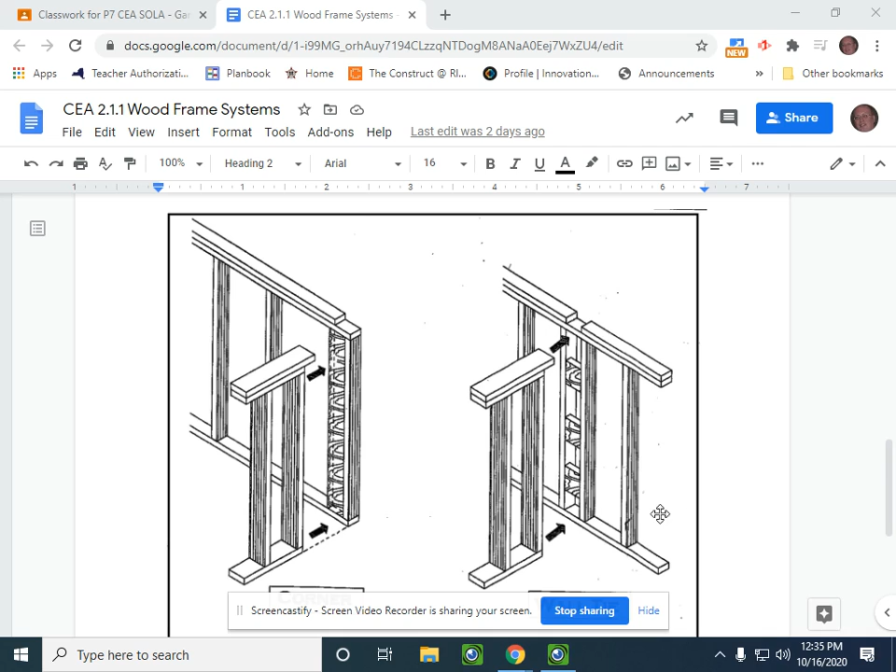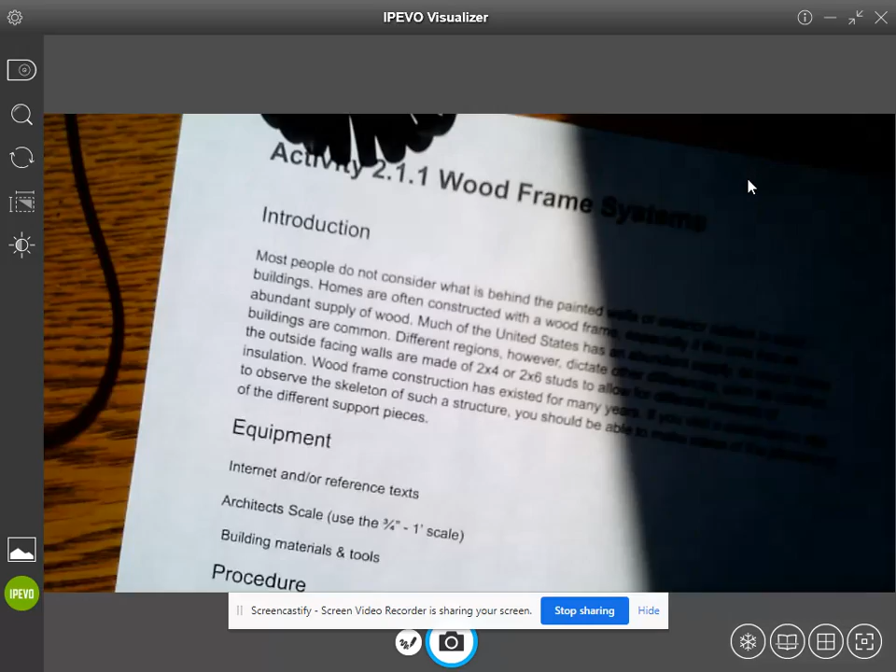And we're going to take a look at the wood frame systems, the second part of this, or this page right here. Now, we're going to measure, and you're going to use your ruler to measure these things. Excuse me. So first thing is find the 3/4 scale, and you want it oriented to the left.

Now, we know that we have the 0 there. That's the larger set of numbers, the ones we're going to read for this. And going to the right, if you'll see 1, 2, 3, 4, 5, so on and so forth, that is 1 foot, 2 foot, 3 foot, 4 foot, so on and so forth.

Now going to the left, remember what did he say the length was of that area to the left? How many feet is it? Is it a foot? Is it 2 feet? What is it? Pardon me? It's 1 foot, right? So it's 12 inches.

So if you take a look at this set of lines that's to the left of the 0, how many lines are there on this left-hand side of the scale? Take a look. What'd you say? Somebody said

it's 24. Because when you go to the left, the first line is actually 1/2 an inch. The next one, which is a little bit longer, is 1 inch. Then you get the next short one, which would be 1.5. The one after that, it's as long as the one that's the 1 inch. That is going to be 2.

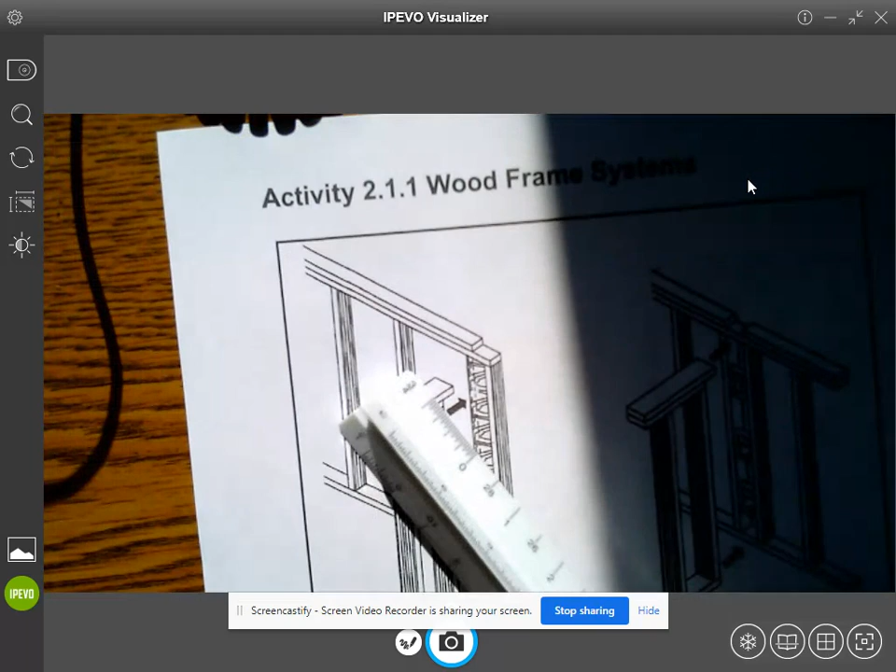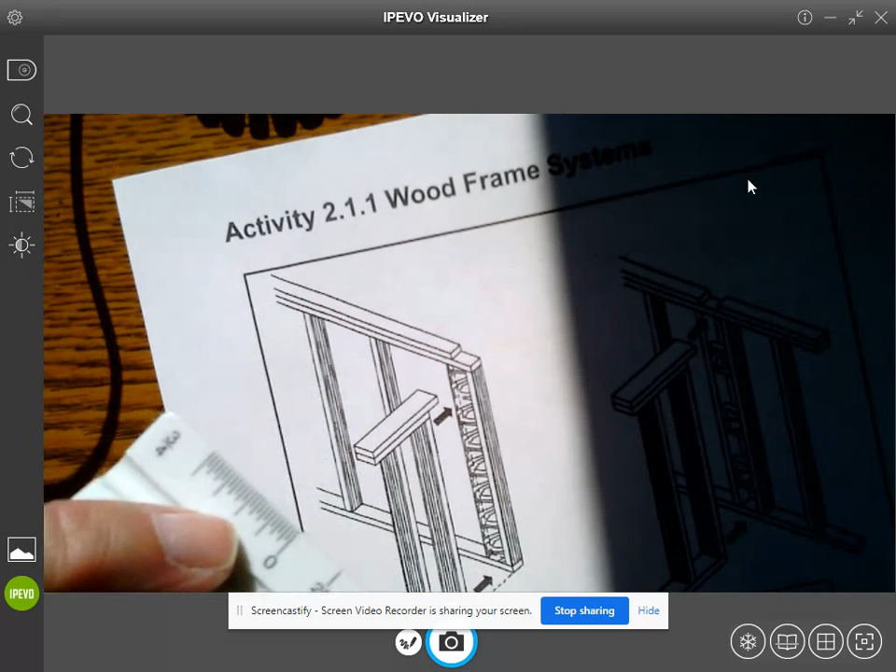And then the very next up, in terms of length, will be the really long ones, and those are 3 inches. So if you take a look at this, you'll be able to see that there's 1, 2, 3, 4 of those long lines. So each one of those tall ones is 3 inches in space, okay, distance-wise.

All right, now this is where an architectural scale differs from other scales. I'm going to pull a shade here and see if I can help with this picture-wise. Okay, so I'm going to measure this line right here. And the way I go about doing that first is I put the 0 on this end of the line right here. So I'm going to put the 0 on that end of the line.

And then I'm going to come down my scale. So there's 1 foot, there's 2 foot, there's 3 feet. And you'll notice that the 3 is past this end of my line right here. Okay? Is everybody with me right now? So what that means is that this line is not 3 feet long. It's something shorter than that.

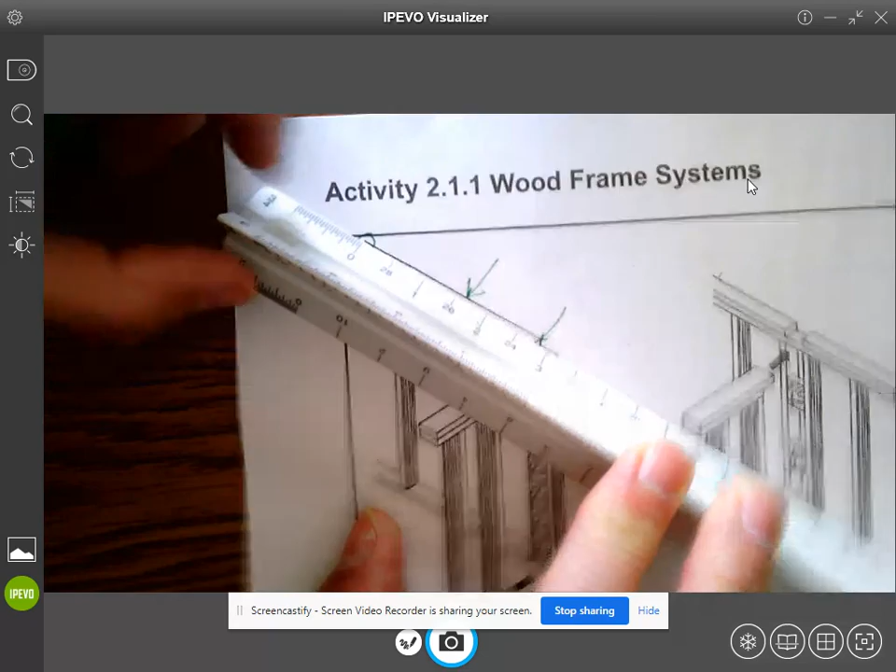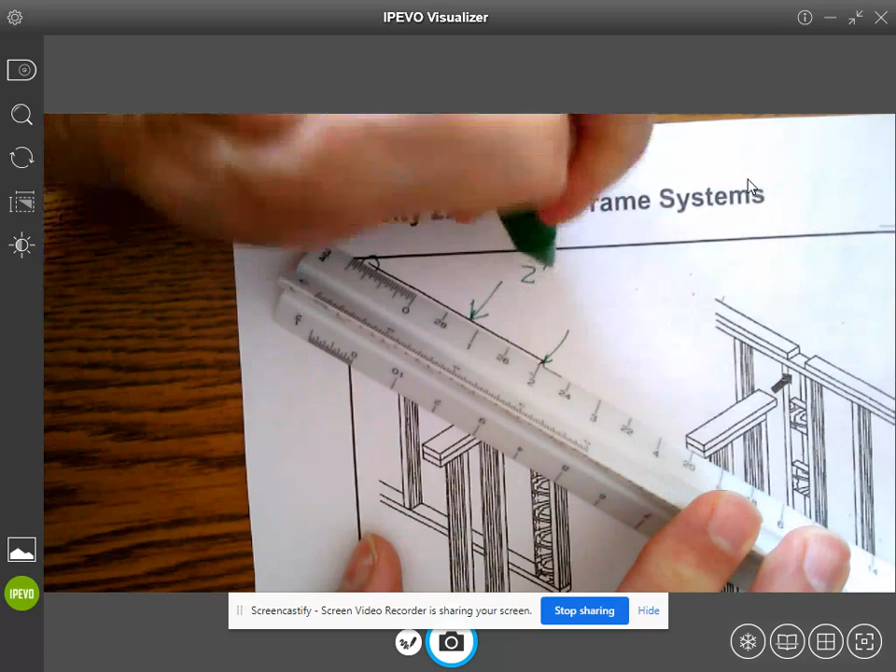So what I need to do is move my scale to the left, or to the right, I mean, and I'm going to take the number 2 and put that on this right-hand corner. Now, this is going to be 2 feet. So this line right here is 2 feet something inches.

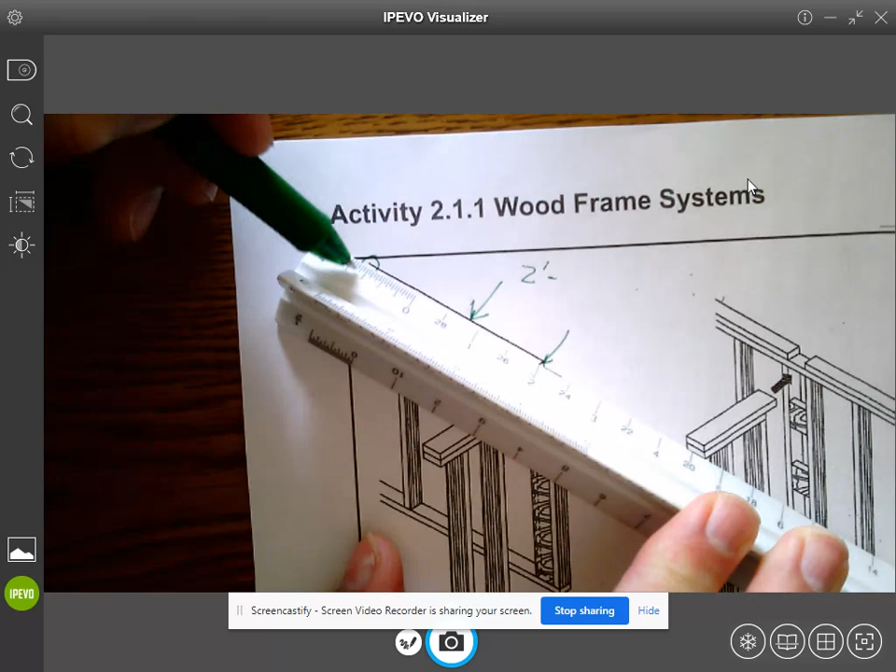To count that off, I know this line is 3 inches from 0 to 3. From here to the next one, that makes it 6. That's 9. And then when I take a look at this, it goes past that first short one, and it goes to that middle length one, which is 1 more inch. So it's 3, 6, 9 plus 1. So that line is 2 feet, 10 inches long.

Okay? Do you understand? Put your ruler on that line, slide the 2 to the end on the right-hand side, and then read the inches on the left-hand side. Do you agree with me that it's 2 feet 10 inches?

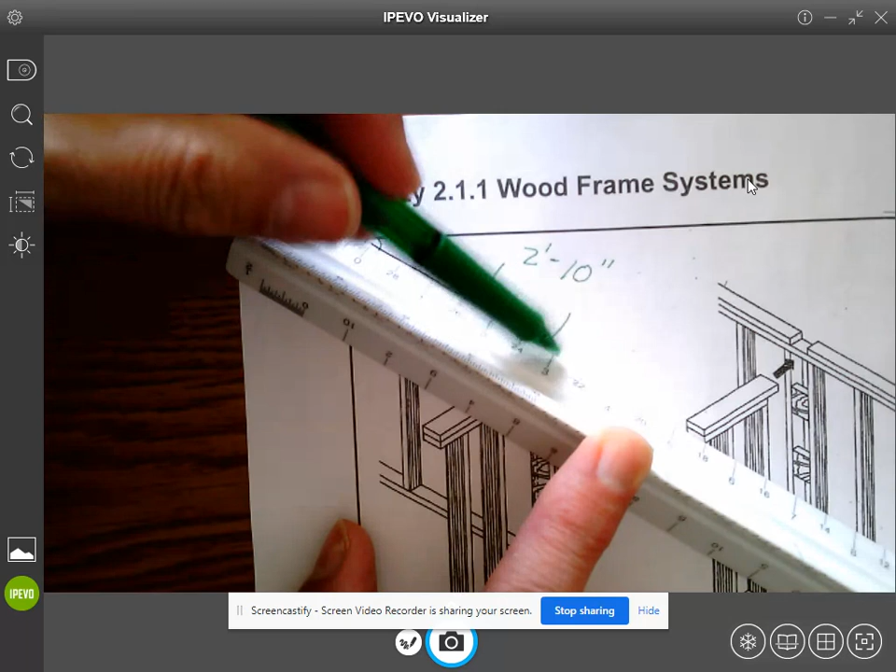Okay. So the first thing always is to go to this left-hand edge, put your 0 on the left-hand edge, and see where you are in terms of the foot measurement. And because I, again, am not all the way to 3, I'm going to pull this down to the 2. So I know that's 2 feet and then 10 inches. This particular scale, you can measure up to, accuracy-wise, a ½ an inch. Okay?

So everything that you're going to measure for this project is going to be done with the architectural scale, and you're going to use the 3/4 scale for that. 3/4 of an inch equals 1 foot. All right? Okay, now, questions?

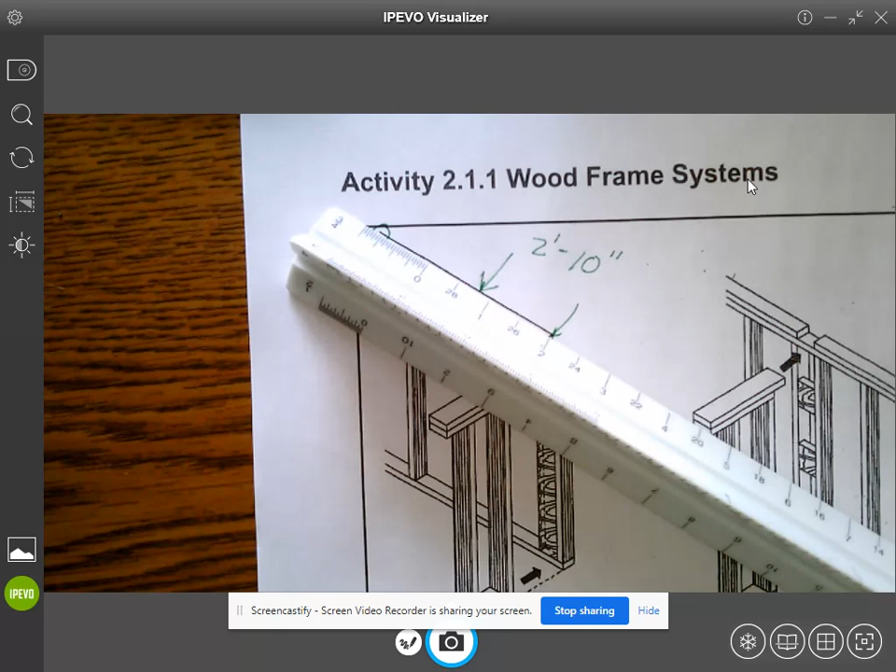Wall studs. Okay, let's take a look at that. Well, not everybody knows everything, Landon, unlike you.

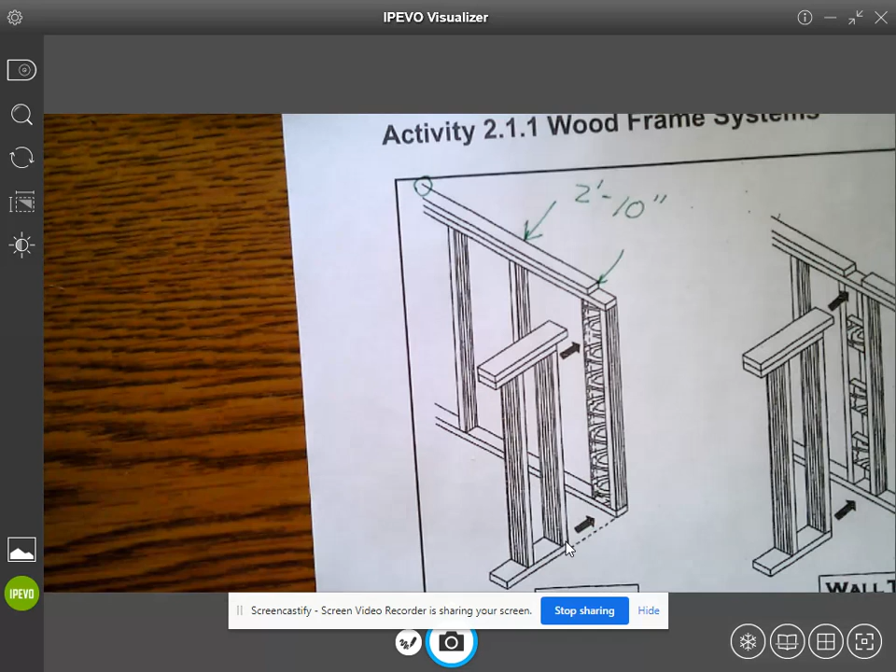So a wall stud is a support that's inside of the wall. So standing up vertically in this room, and every wall that's in this building, except maybe the exterior ones, the exterior might be a different kind of framing, are studs. All right? They are 16 inches on center. So if you measure from the middle of this stud to the middle of this one, right here, it should be 16 inches. So actually, I should do that on here. So if I measure from the middle of this stud to the middle of this one, that is going to be 16 inches in distance.

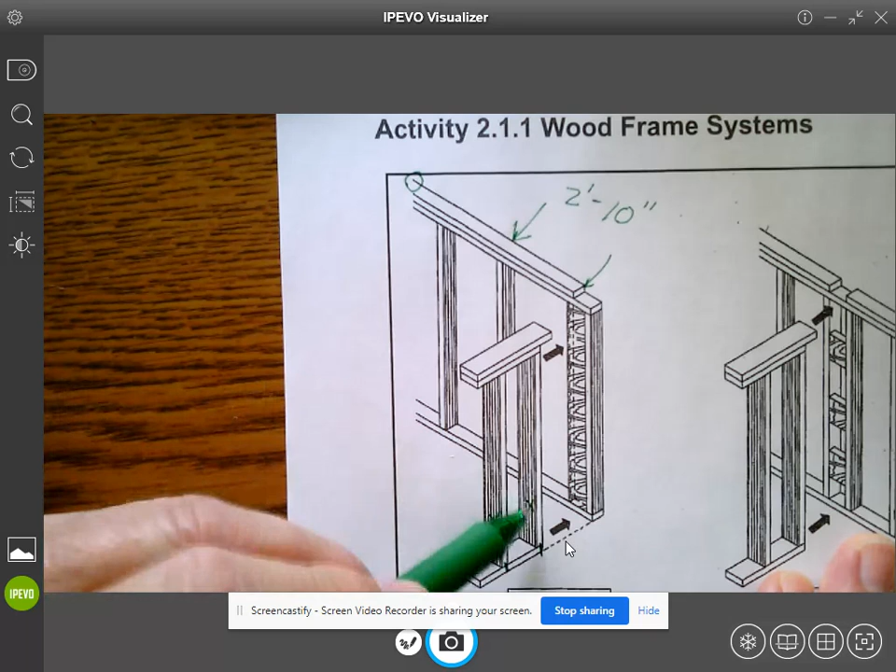And this is where I start to confuse people. That also means that the distance from this surface on this stud to this inside surface on this stud, so from this line right here to this one out here, that is 16 inches also. So not only from the middle of the stud, but from the inside face to the outside face, it's going to be 16 inches of distance on your ruler. Don't forget, when you're measuring 16 inches, it's going to be 1 foot 4 inches when you're measuring 16 inches on center. Right?

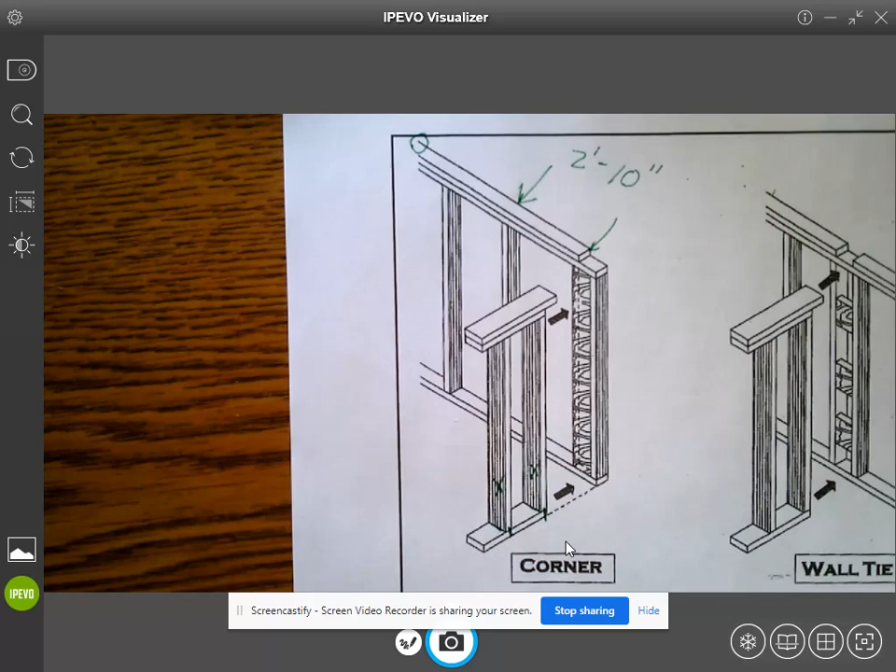So these two different drawings are the different ways that they put houses together. By the way, the wall studs in this building, or any commercial building that's been built in probably the last 40 years or so, are going to be made out of steel. And why do you think they might use steel for wall studs in commercial buildings? Nope. Maybe some of that. They're light. Fire. They don't burn.

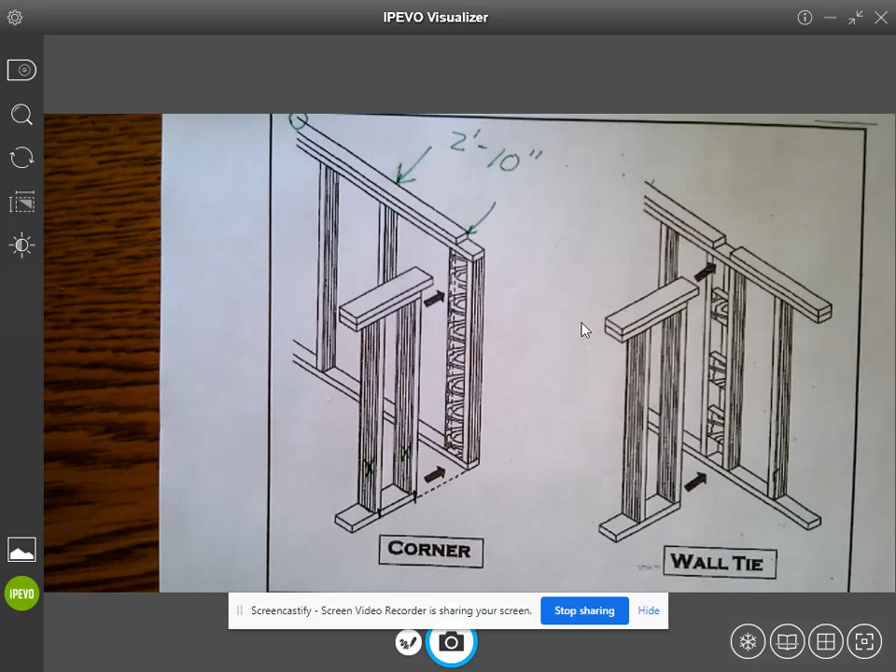Okay. All right. So this is a wall stud right here, George. This is also a wall stud. Oh, I'm doing this on my screen. This is a wall stud. This is a wall stud. Anything that's a vertical piece of wood is a stud.

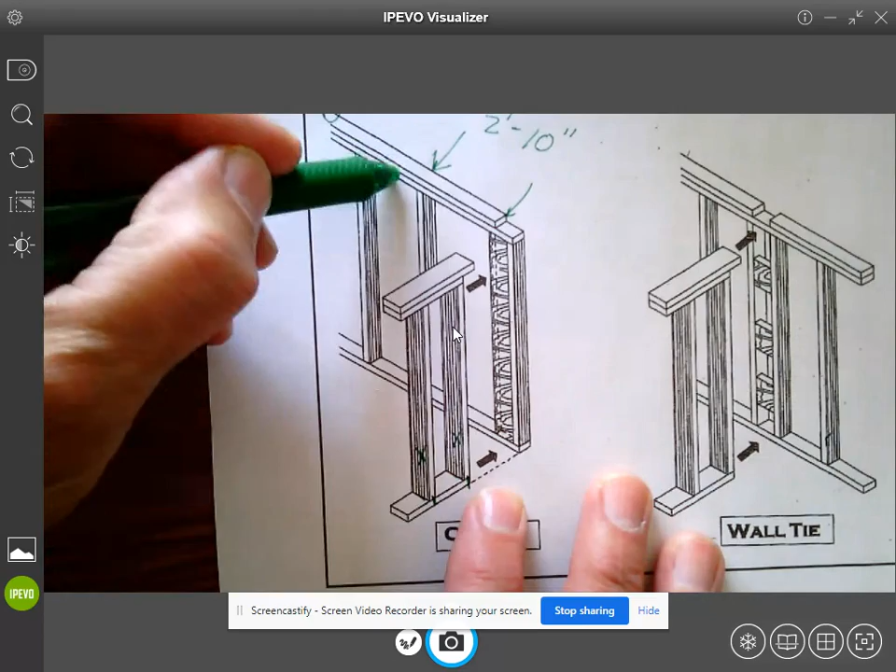Okay. These things up here, and this is going to be part of it after you get your model built, you're going to need to know what the name is of all the components on this wall. So this board has a name. The one below it has a name. The one that's on the bottom has a name. So you're going to need to label those things on your models when you are done. That's the part where you're going to have to use internet resources or reference books of some sort or another. Okay?

All right. So let's see. What time are we done with this class today? 49. So we got just about 4 or 5 minutes. So we don't have enough time. So I'm going to stop sharing my screen.